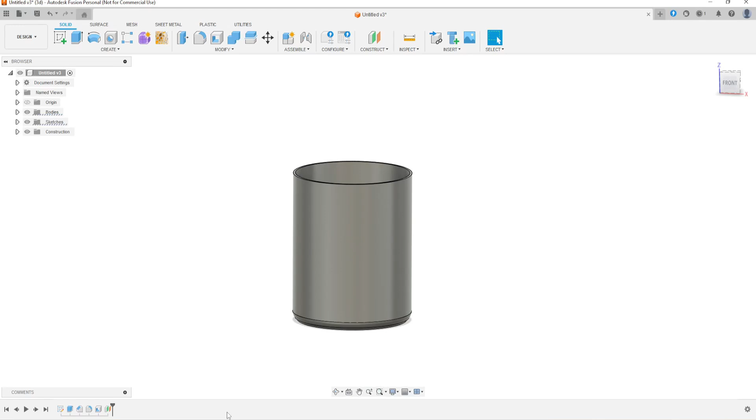When you open Fusion, if you look down there is a small bar with a comment on it. A lot of people don't know what it is. There is comment on point, comment on object, and also you can capture a picture there. There is an empty space where you can write a comment. I will show you how to work with this comment tool.

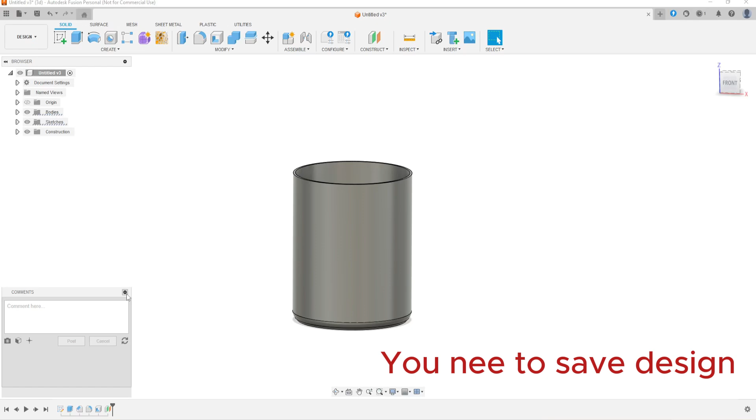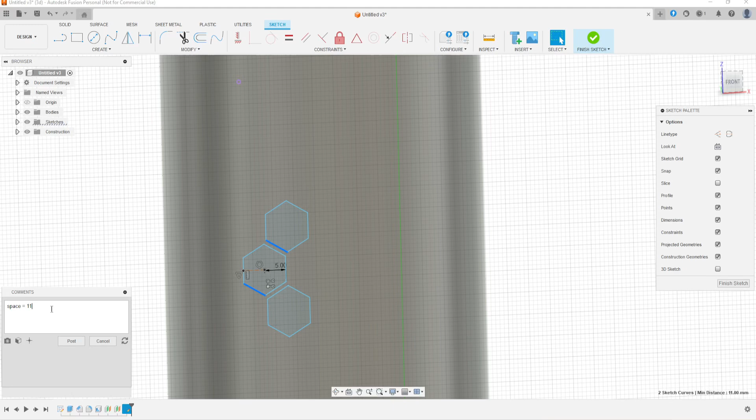If I want to emboss this sketch on this face, look at this distance between that angle and that angle, it's 11 millimeters. You can write it down on the comment instead of trying to remember it. If there are a lot of numbers, you can't remember everything. We write space 11. I need to know the circumference of the cylinder.

If I click I and select circular, I can say the length. These kinds of numbers might be difficult to remember. Instead of writing it on paper to remember, I can write it down on the comments. That will be much easier for me.

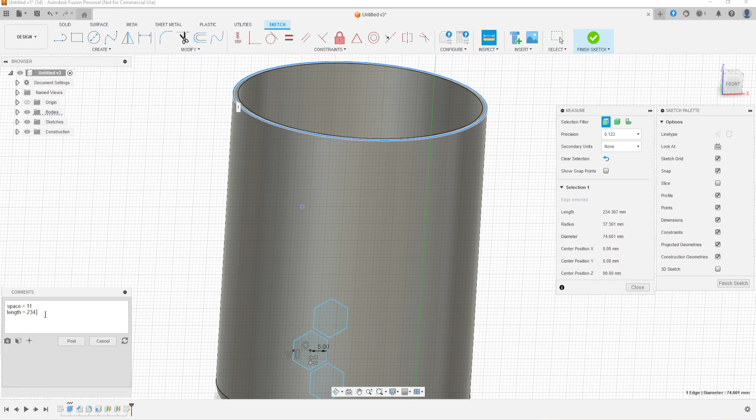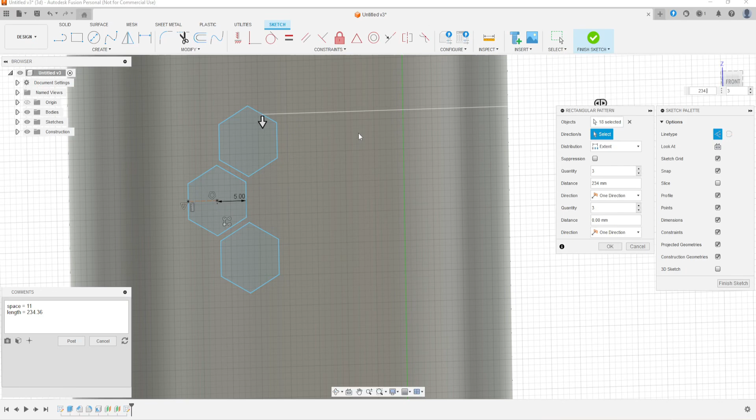After that, we just need to go to rectangular pattern. Then we just select objects, then we select direction, then the distance, it will be the length minus the space. So we write the length minus space, but it is 11. Then we will add the quantity, which will be the length divided by the space.

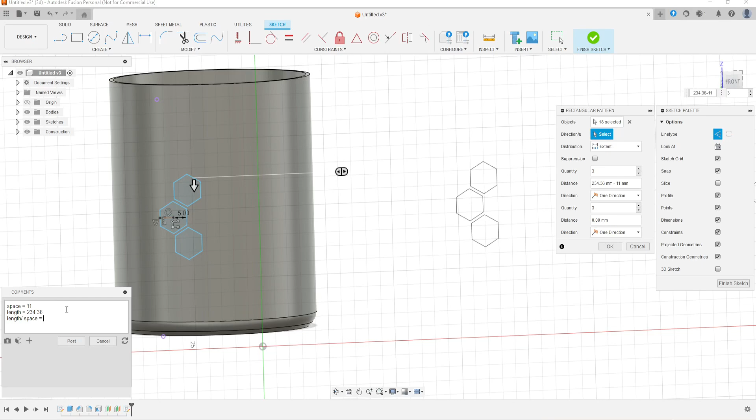The quantity can't have a decimal point. For example, here it will be 21. You can't put 21.27, we just put the direct number 21. Then we select. After that, we will emboss, select all this sketch, write emboss, select the face, and click OK. You can see it now, it looks perfect.

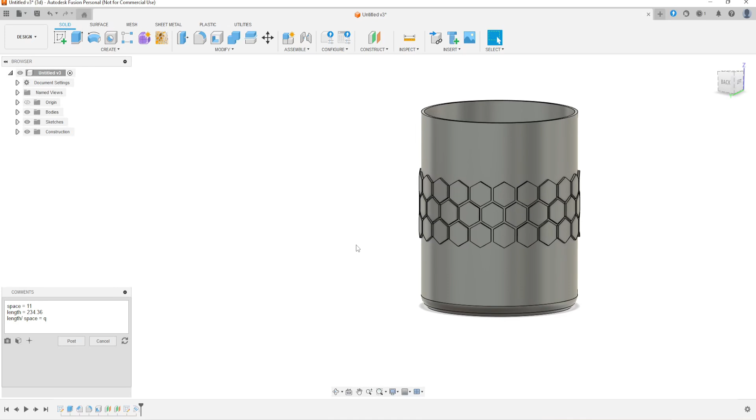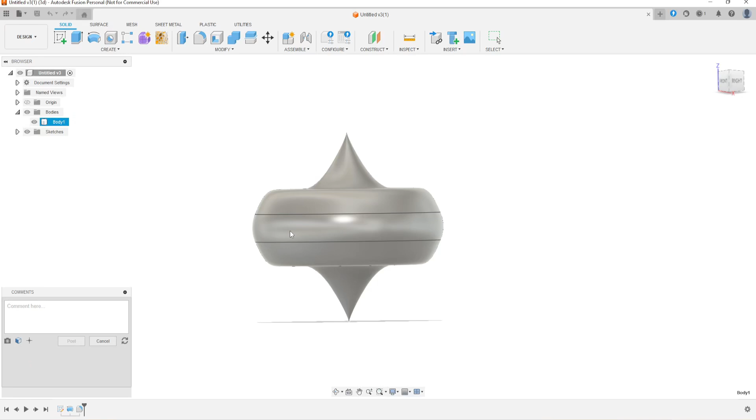There is another option where you can put a comment on an object. For example, we have this body which needs support if you want to print it. Especially if you work with other designers, it's easier to give a comment. For this, you just go to comment on object, then select your object and write a comment. After writing a comment, you can click post so that you post this comment, so others can see it.

So if you go now down, you can see it. When I click, I can see this object with a comment, and you can also delete that.

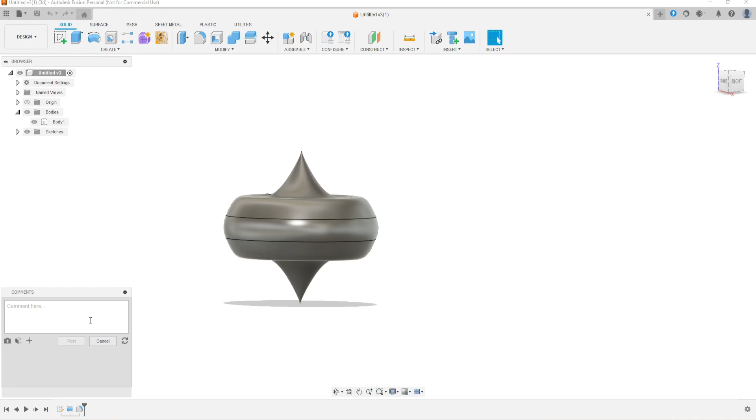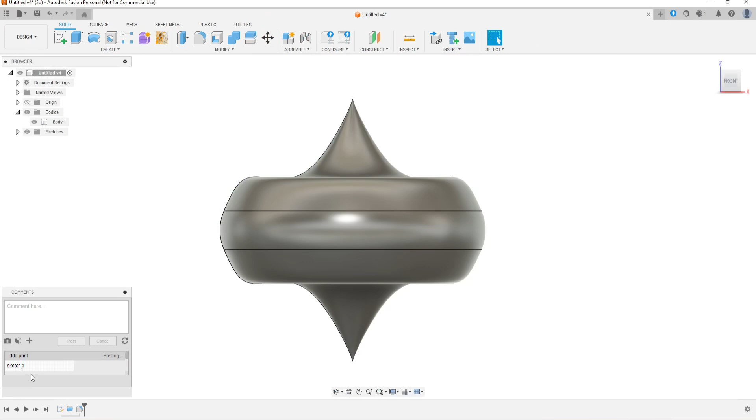There is an option called capture picture. It's like a screenshot. For example, you come back to your sketch, you capture a picture, then write sketch 1. After that you can post, so you can see it down now. So when you finish a sketch, you can see it down there. So I can take the sketch and work at the same time.

So click there, you can see that you can zoom, and at the same time you can work with your object instead of showing my sketch and hiding it. So I can do things at the same time.

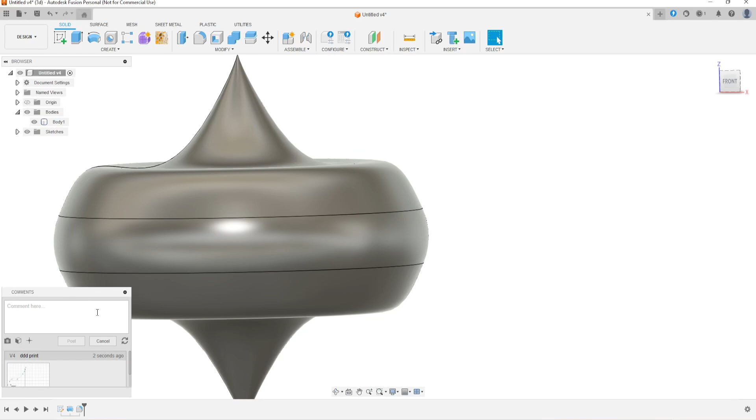There is another option called comment on point. So if I select comment, I can put a point on the body, then I just take a picture, a screenshot where the point is, then you can write a comment. For example, here you are splitting the body so you can print it as 2 separate parts. So now you can see it here.

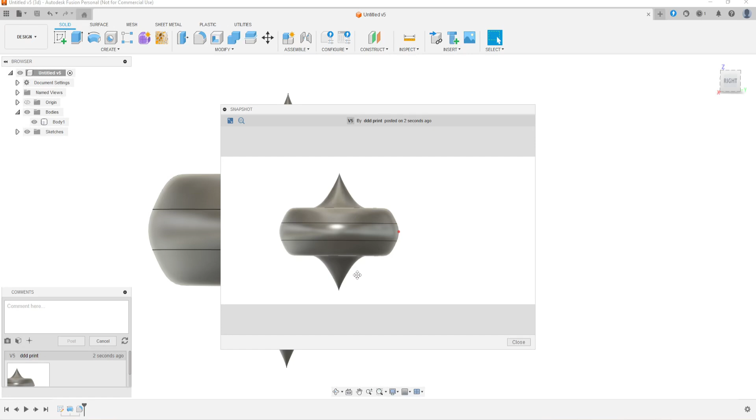This comment tool can help you so much to organize your work. To use this comment tool, first you should save the design so that you can use it. If you are using the Fusion free version, you can't save more than 10, it's limited. So you can see you can't save more than 10.

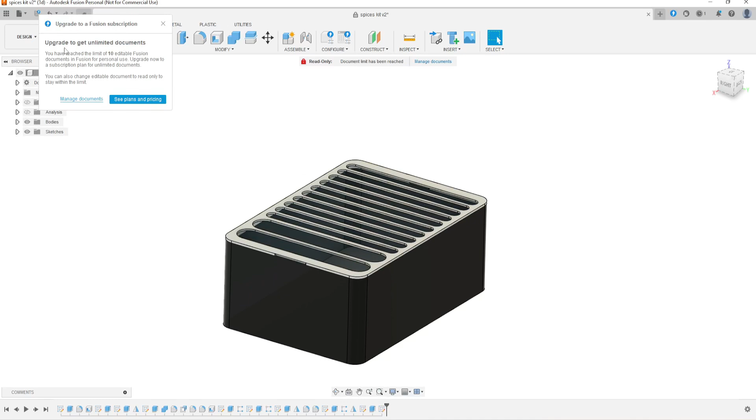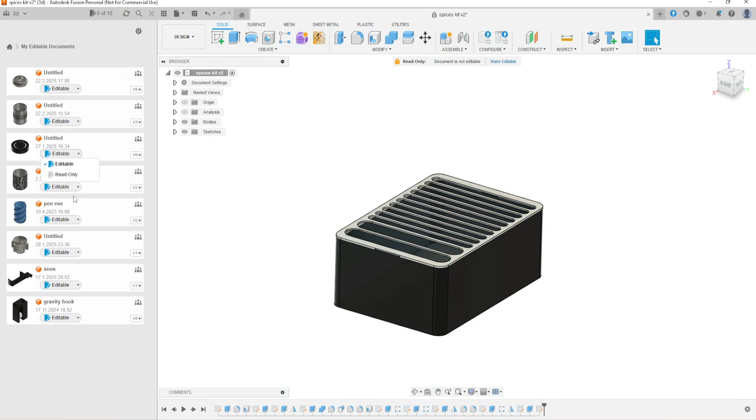So to save more than 10, you just need to move your editable design to read only. You just need to click, make it read only, and click read only. By doing this method, you can save more than 10. You can see the number here, it's 5 of 10. We can save now the design, click OK, now it's saved.

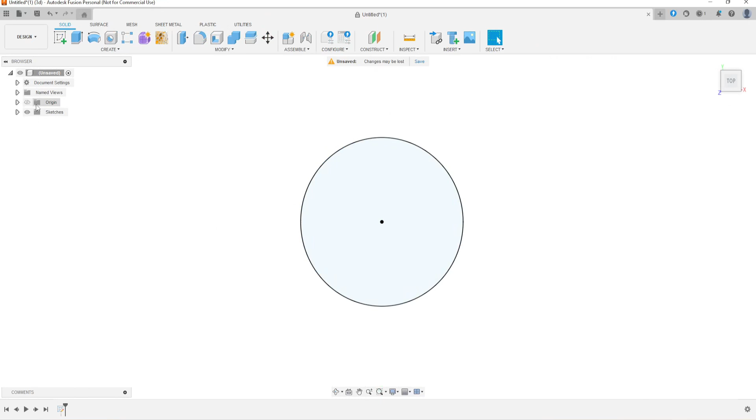If you are creating a sketch on a plane, let's create a circle, put it at 100. Then you finish the sketch. Then you realize that you created the sketch on the wrong plane, so you want to move it to the right plane. You just need to go to sketch, right click, select redefine, then select the plane you want to redefine that to, and click OK.

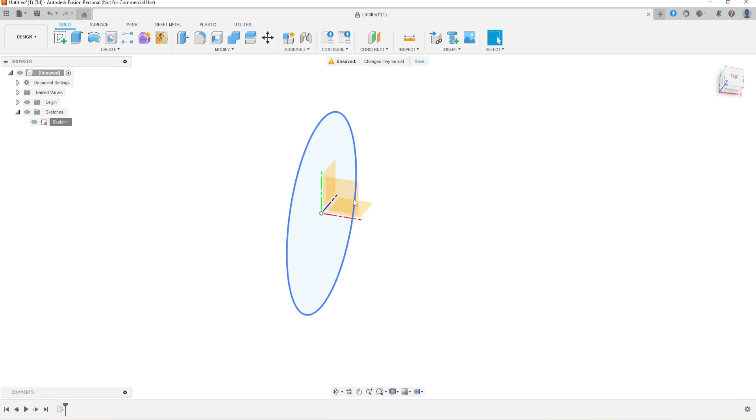So now it's done. To redefine your sketch, you should define your sketch first. For example, let's go and edit this sketch. We will put it out from the central point, so now you can move that. So if I try now to redefine that, I cannot do that because I should define the sketch first.

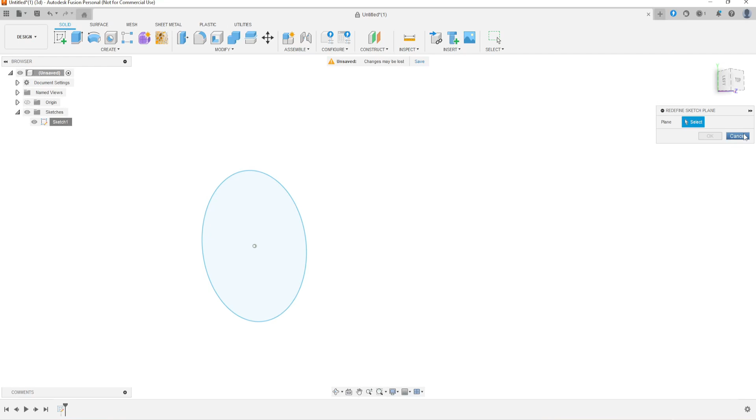So how do you know that your sketch is defined or not? There are three ways. First way, you can look at the sketch, there is a pen there. Also there is another sign, the circle is blue. If it's defined, it will be black, and also you can move it.

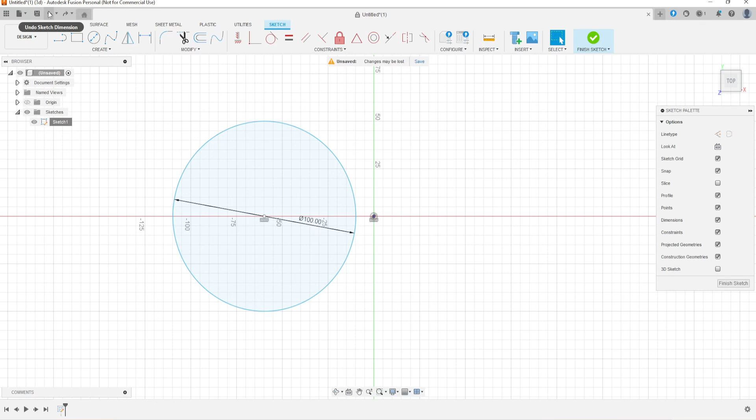So if I fix that and add a dimension, you can see the color change from blue to black. Also if you look at this sketch, there is a lock there. So if I go back, now you see there is a pen and the color had changed to blue. Now it's black and there is a lock, so I can't move it. So now if I right-click and redefine sketch, I just show the origin, select, and you can change that.

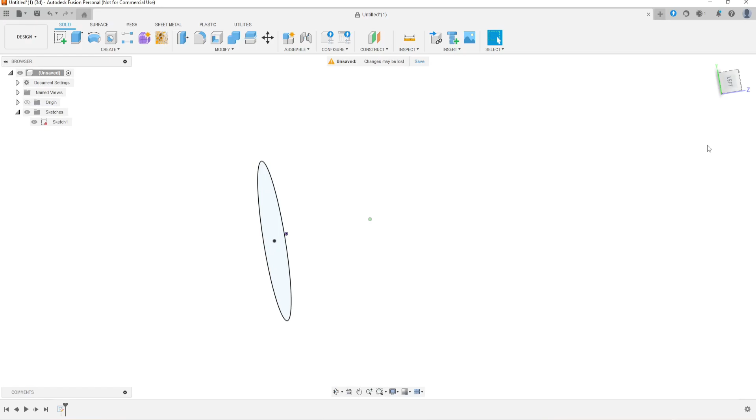While you are designing in Fusion, you are facing the screen for a long time, and that can affect your eyes. I don't want that to happen to you. You can use anti-blue light glasses that can protect your eyes from blue light. Whether you are using glasses or not, you can still take a break every 30 minutes or 20 minutes. That can help your eyes to blink better and relax.

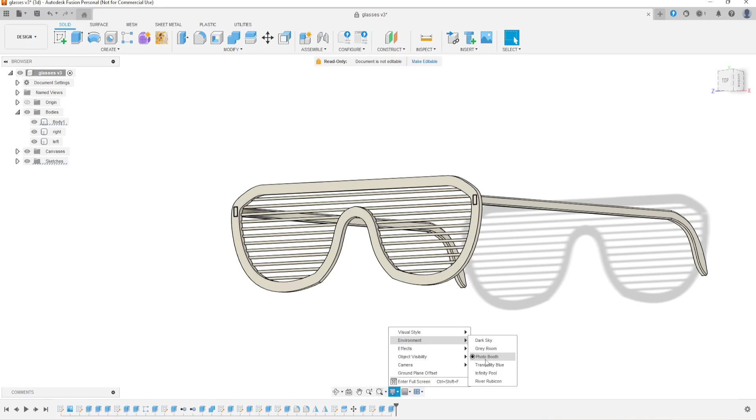Also, there is another option that can reduce light in Fusion. You just need to go to display and select environment, where you can change the color from white to something darker. That can help your eyes. There are a lot of different colors in environment. You just need to try and see what's best for you. For some people blue works, for some people gray works. Of course, I don't mean that you buy these glasses for what is in the design.

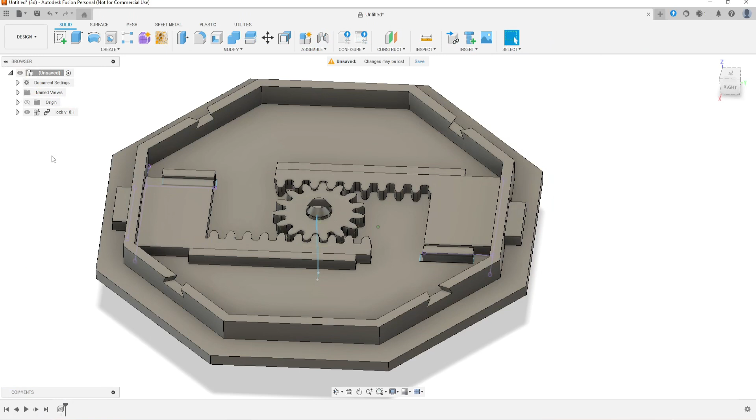You can open an existing design to a new or current design. But if you just want to open only bodies, you don't need to open the full design. You just need to go to create, then derive, select, then you save that. Then you select the bodies that you want to export. After that you click OK, then you will see it's opening a new design. Here we have a little problem and we will fix that.

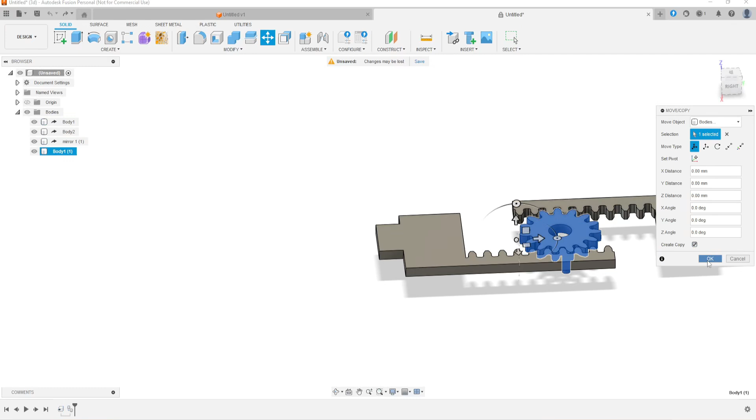If you look at these bodies, if I try to turn them into components, I cannot do that. So you can see there is an error there. It's an error. Instead of that, we will create a copy. So we click create copy. Then you see there is a new body. So we will create a copy of all these bodies. And after that, we can create components from these copies.

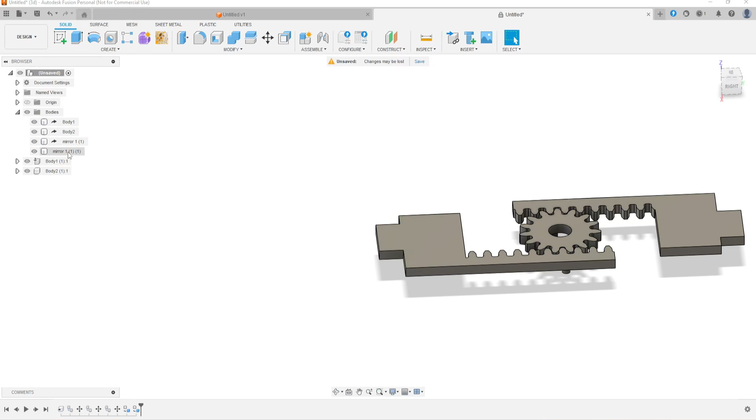We transform them to components. So, to component. So we can hide this. Now you can see that all of these are components, and you can move them. And that can help to work with assembly or animation.

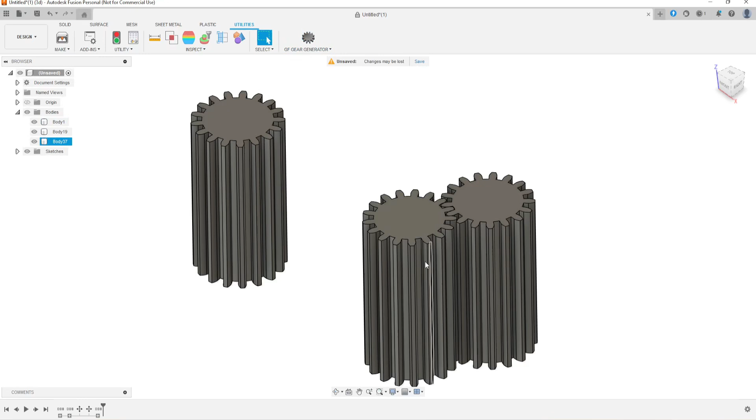If you want to add features like Voronoi, or you want to work with gears in Fusion, you just need to go to utility, then choose Fusion Store. After selecting that, you will find a lot of features that you can download and use. Some features are free and some features you have to pay to download. There are plenty of features for different uses, you just need to see what's best for you.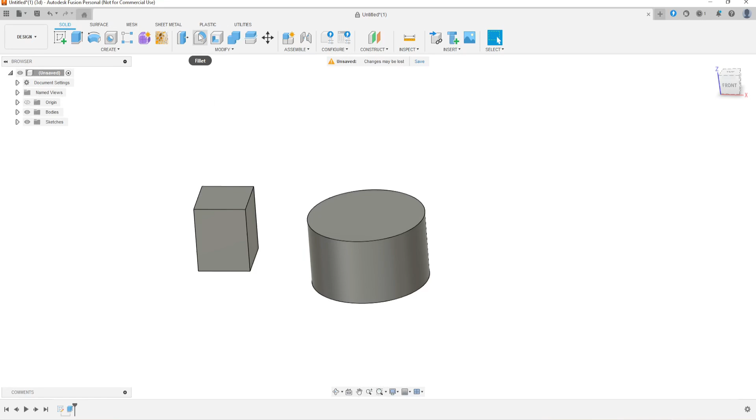If you want to add a fillet to the cylinder, you just need to select fillet, then add a number, click OK. Also you can do it by using a shortcut key: press F, then you add that. Shortcut keys can make your work much faster. You can even create your own shortcut keys.

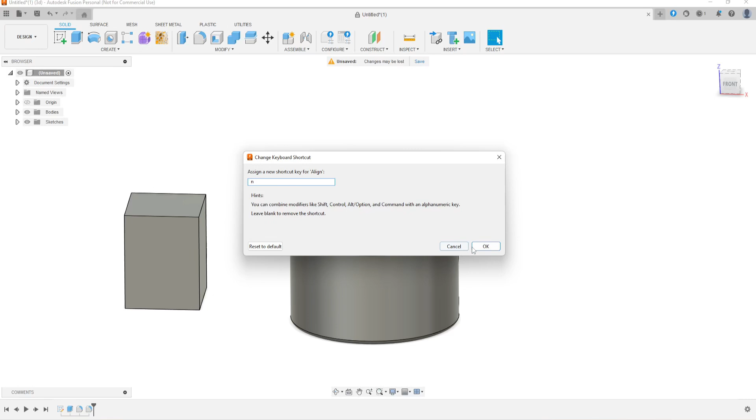For example, you go to align, there are 3 dots there, you click, then you choose change shortcut, select that, then you select what you will put. So for example, I can put N as the shortcut key for align. Then I just click OK. So now if I press N on my keyboard, you can see align. So I can select that, select that. So now it works. Instead of searching for it, I can use a shortcut key.

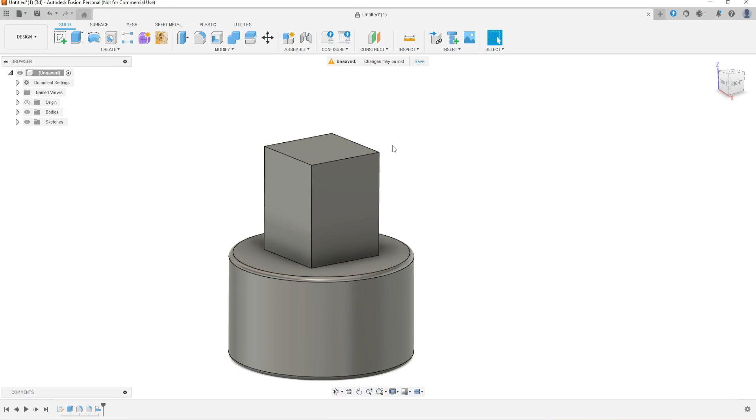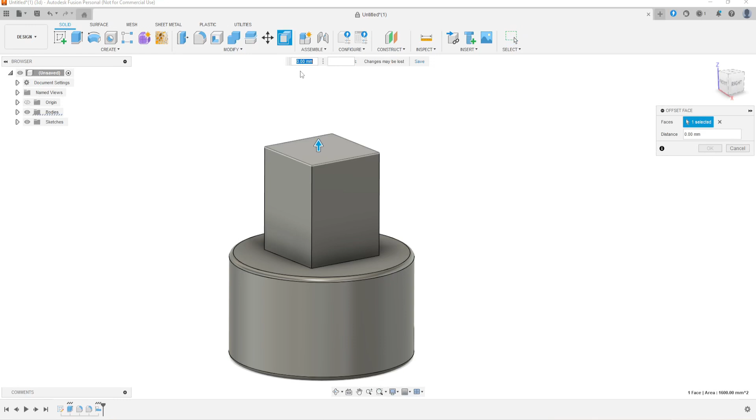Now if we come back to modify, we will find align with the shortcut key N. You can see N is here. And there is another method where you can show these kinds of tools on the toolbar. You just need to click these three dots, then pin to toolbar. After that, you can see it's here. You just need to select it and we can use that tool. It's much easier to find tools when they're in the toolbar.

Usually people have different styles of how they work. Some people prefer to work in mesh. Some people prefer to work in solid. You just need to build a system that's much easier for you. And that makes it more comfortable to work.

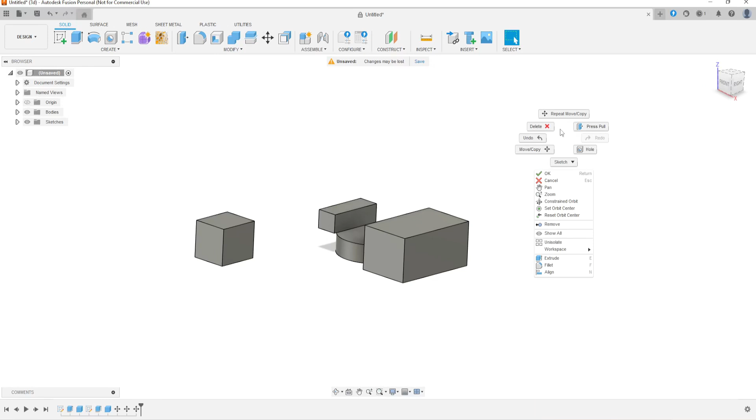If I need to move this cube, I can select it from the toolbar and move it. After that, if I need to repeat the same thing, I don't need to go and select it from the toolbar. I can easily right-click, then select repeat. So then I can do that. If I need to repeat that, it's enough for me to just right-click and move the mouse up, then it will happen. So I don't need to click many times. I did that with a replay, I will show it to you normally. I'll try to explain it for you.

So if I right-click, if I go to that, I go to press pull. If I go up, I will move. If I go there, I will delete. If I go left, I go back. If I go right, I go front. If I go down, I go sketch. But instead of clicking many times, I can do it faster. I just need to right-click and move in the direction I want. For example, right, it goes back. You could go front, you can see now, I go back, around. If you move it up, it will repeat what you did last time.

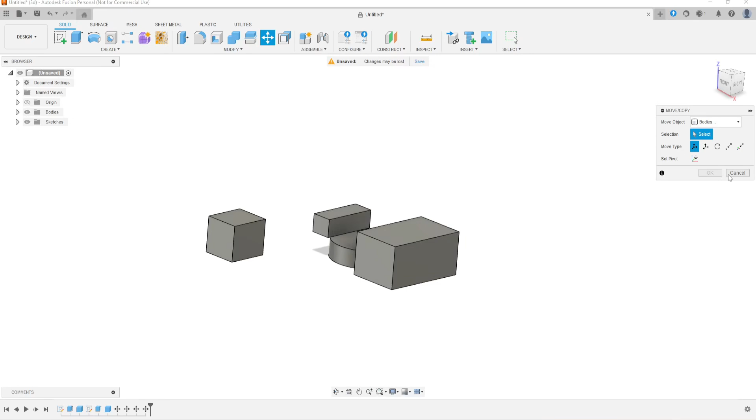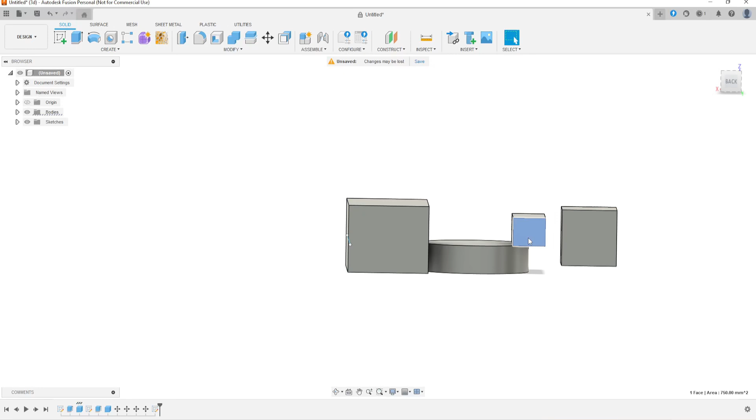And also if you select and you go down, you will create a line. So you can see that I have a line that I can use. So you can finish the sketch and do it again. Select a face, then just hold right-click and go down. You can see there is a line. I can use a line. You don't have to work with that, but you can try it. If you feel it's easier for you, then you can use it.

I hope this video can help you to design better.